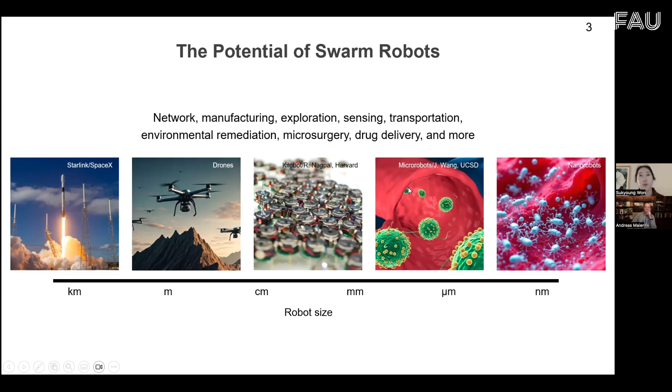Swarm intelligence has some key components. The most important thing is the local communication between the agents. Each agent can interact with nearby agents, and by these local communications, the multiple agents can work together and organize to adapt in new situations and respond to changes in the environment.

Because of this collective behavior, the agent swarm can complete a task even if some agents fail to come to mission completion. The remaining agents keep working together to finish the mission, which I call fault tolerance.

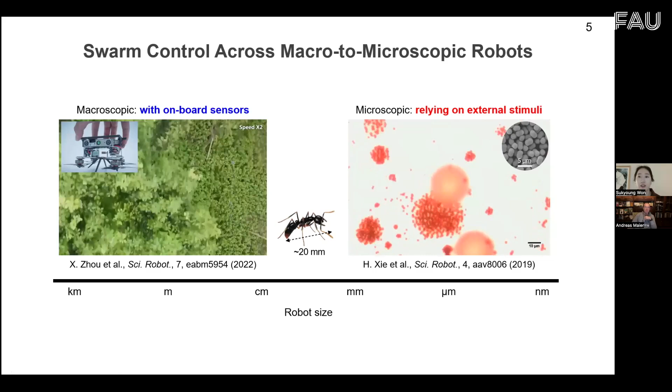To control swarm robots, the macroscopic robots typically use built-in sensors inside the robot body. However, when the robot size decreases, it becomes difficult to integrate sensors and batteries inside the robot's body. So instead, these small-scale robots rely on materials that respond to external stimuli like light, magnetic field, or ultrasound.

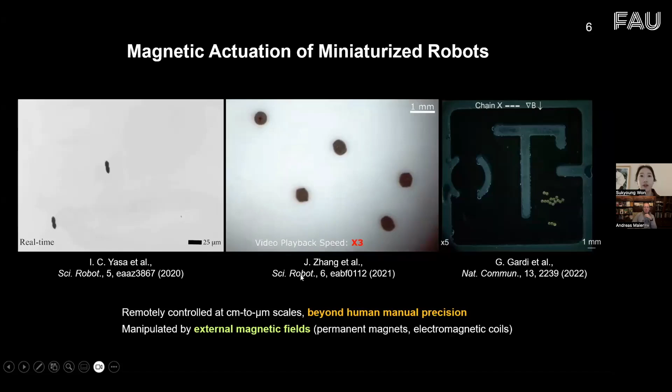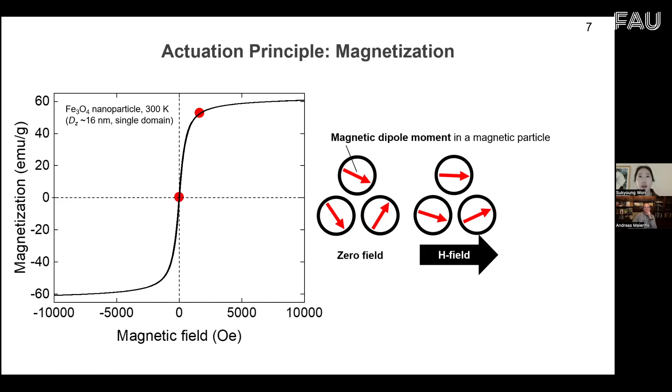Particularly, magnetic robots can be remotely controlled in the microscale environment where manual control is not feasible. By adjusting the direction and magnitude of the applied magnetic field, we can precisely control the motion and direction of these microrobot swarms. This magnetic actuation is induced by the magnetization of the magnetic materials in the robot body. The magnetic dipole moments within the materials tend to align with the direction of the external magnetic field, and this alignment generates the magnetic torque applied to the microrobots.

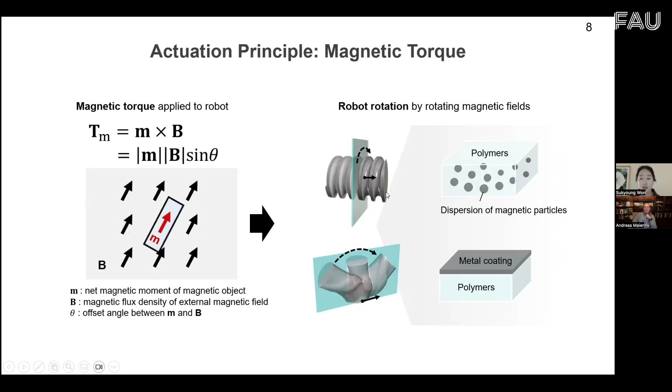When we apply a rotating magnetic field, the dipole moment continuously aligns to the direction of the rotating field. So we can demonstrate rotational modes of the robots, such as corkscrewing, pivoting, rolling, or other rotational motions. To realize magnetic swarm intelligence, we need to think about the magnetic interaction energy, because the microrobots are positioned very closely to each other.

Magnetic interaction energy increases rapidly, as this equation shows an inverse cubic relationship with dipole distance. Due to this high interaction energy, robots may assemble unintentionally, and this aggregation makes it difficult to control the desired motion or predict the trajectory of the robots. So to achieve magnetic swarm intelligence, we need to implement the key components.

First, the important thing is local communication by magnetic interaction. The robots require controlled magnetic assembly and disassembly, and based on this local magnetic interaction, the robots can show self-organization with reconfigurable swarm behavior through multimodal actuation.

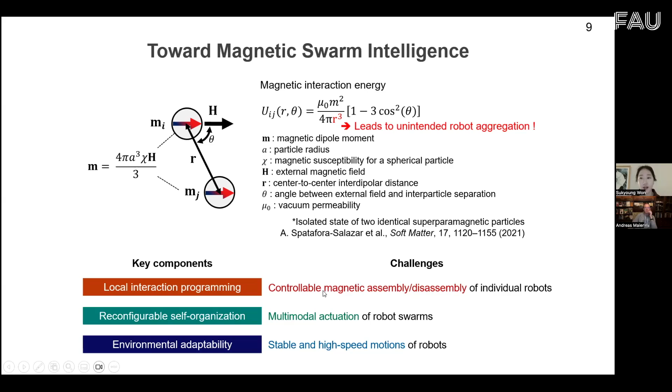And the last one is environmental adaptability. These robots require high-speed actuation while maintaining steering stability even at high speed. So we can ask, what if we can control the distance of the magnetic particles by processing the polymer and magnetic particle composites?

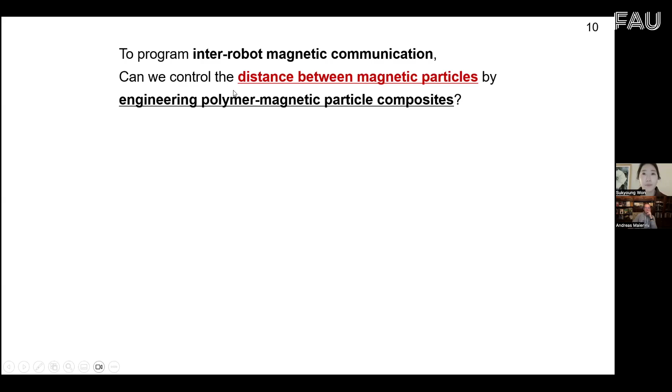This enhances the inter-robot magnetic communication, enabling more precision and swarm controls. One possible approach is to modify the spatial distribution of the magnetic particles. For example, we can adjust the particle dispersion inside the robot body or apply particle coating onto the robot surface. According to this magnetic interaction energy equation, the decrease in particle distance drastically increases the magnetic attraction. That means the surface-coated magnetic particles can enhance the inter-robot interactions and promote the self-assembly between multiple robots.

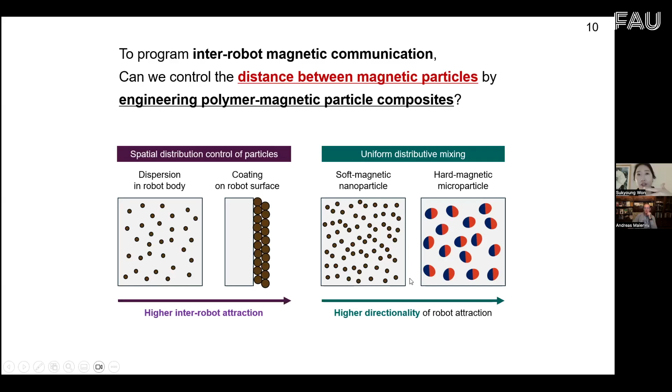Besides the spatial distribution, we can also consider the magnetic properties of the particles, such as soft magnetic or hard magnetic properties. These magnetic anisotropic profiles in the robot allow the programmability of the assembly directions. So the first introduction is that the magnetic nanoparticles are uniformly distributed on the nanoscale in the polymer composites to achieve independent motion of multiple magnetic robots. This can minimize interruption from the magnetic force between the microrobots.

However, nanoparticle dispersion is challenging due to their high surface area to volume ratio and their closer interparticle spacing compared to microparticles at a given concentration. Additionally, these nanoparticles have a high diffusion coefficient, meaning that they move easily within the composites. As a result, they exhibit stronger interparticle interaction, leading to particle aggregation, which could negatively impact the robot performance.

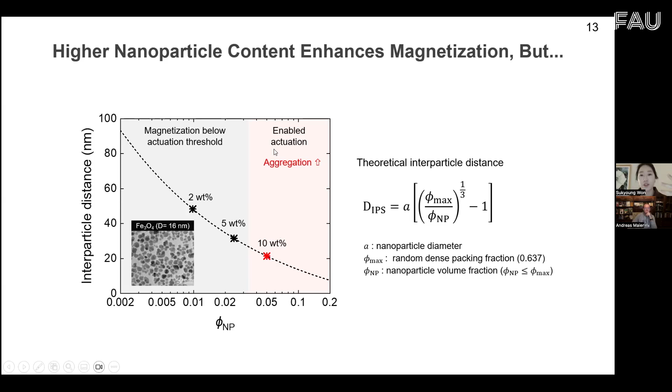Additionally, we require high nanoparticle concentration to obtain enough magnetization and actuation. However, as we can see in this graph, this decreases the interparticle distance and promotes nanoparticle aggregation. So we implement the rapid precipitation method for achieving distributive mixing of these magnetic nanoparticles.

First, the polyurethane and the nanoparticles were mixed in a good solvent, which expands the polymer chains by increasing their radius of gyration. Then the polymer mixtures were rapidly precipitated in the poor solvent, which contracts the polymer chains by reducing their radius of gyration. This rapid polymer collapse trapped the nanoparticles, preventing macroscopic phase separation. And we can see this nanoscale dispersion of the nanoparticles in the thermoplastic polyurethane matrix.

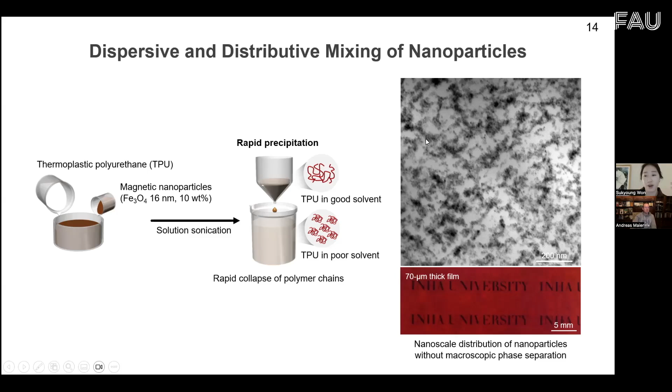We chose the thermoplastic polyurethane matrix because of its high elongation capability of over 600% and its thermoplastic properties. Due to TPU's high flexibility, we could do super twisting, stretching, and transform the two-dimensional nanocomposite films into three-dimensional helical microrobot structures. And by applying heat treatment, we could shape-fix these helical structures after the twisting processes.

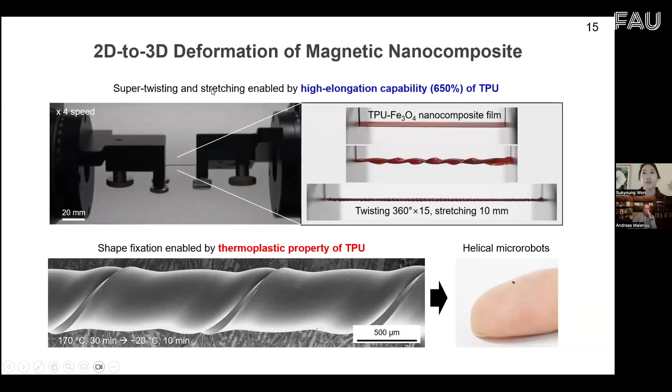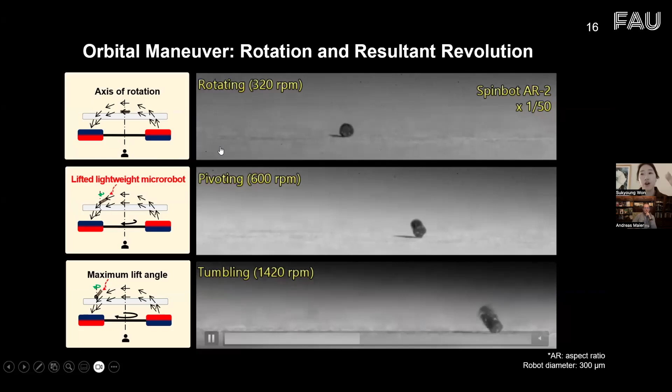Because of the lightweightness of these nanocomposite-based robots, with a weight of only 180 micrograms, they could be easily lifted along the direction of the magnetic flux generated from the two permanent magnets. When these two permanent magnets rotate underneath the microrobots, the robots follow the direction of the rotating magnetic field. So we can control three multimodal actuations of rotating, pivoting, and tumbling depending on the frequency of the rotating magnetic field.

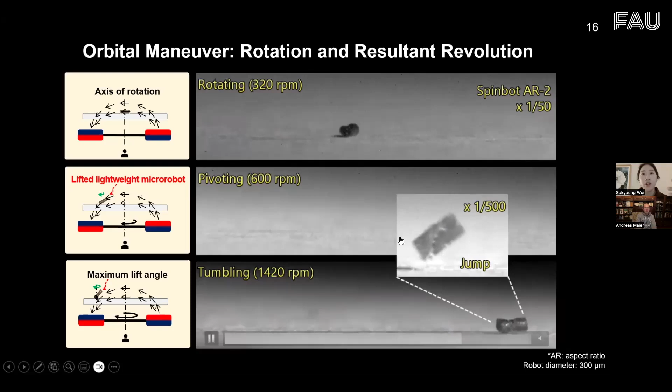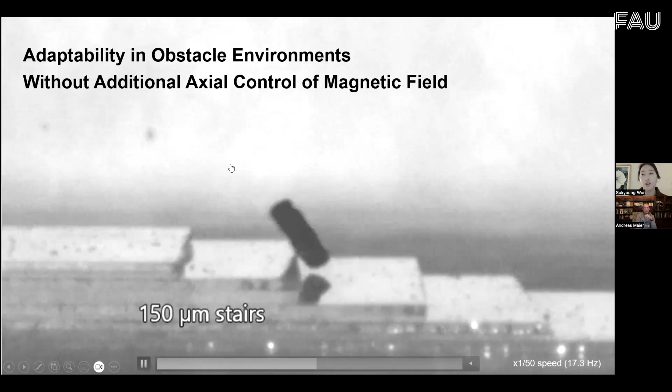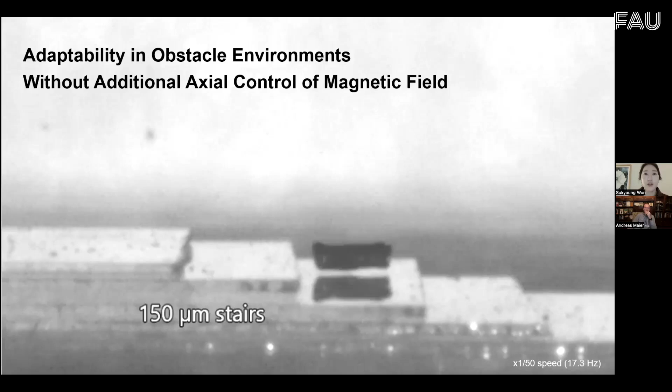Particularly at a high frequency of the magnetic field, the robots can show tumbling motions with a jump behavior, allowing rapid actuation and adaptability in obstacle environments, even though we did not additionally control the axis of the magnetic field. The rotation and revolution of the microrobots result from the force balance between the centrifugal force of the rotating magnetic robots and the magnetic centripetal force from the permanent magnets.

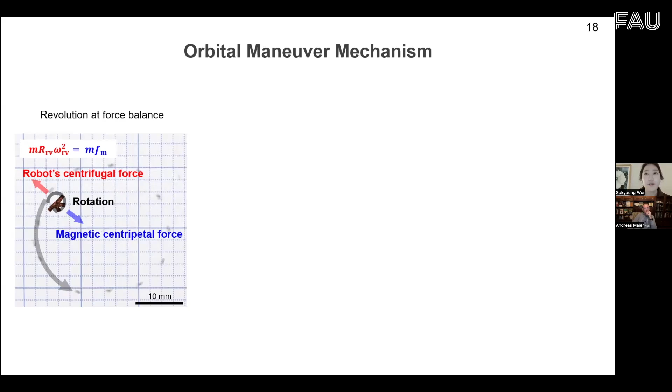So we can expect their trajectory, because the orbital radius of the microrobots is determined by the robot body length and the magnetic frequency based on this force balance equation. So we can tune their trajectory and actuation mode by adjusting these factors. And for the collective behavior, these orbital maneuvers were achieved without magnetic interaction between the robots due to the high actuation speed of up to 60 body lengths per second for the tumbling motion case.

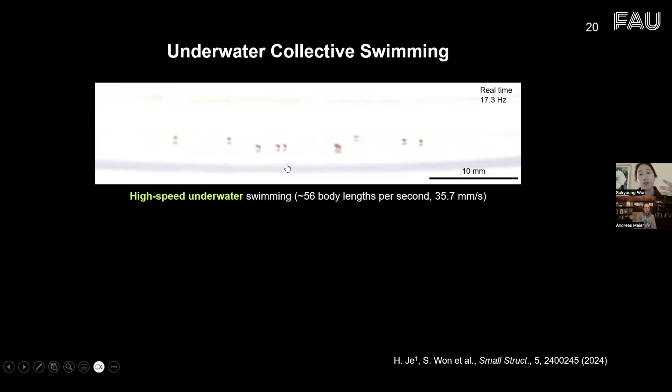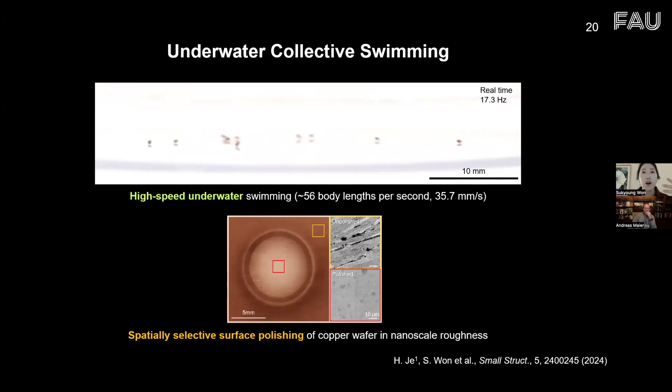Additionally, robots with different aspect ratios experience varying centrifugal forces, enabling independent multimodal actuation of these multiple magnetic robot systems. These robots could even demonstrate collective swimming underwater at a really high actuation speed of 56 body lengths per second. Using this high-speed collective swimming behavior, we successfully demonstrated nanoscale surface polishing of the wafer using abrasive silicon nanoparticle solutions. However, for this high-speed actuation, steering stability is also really crucial.

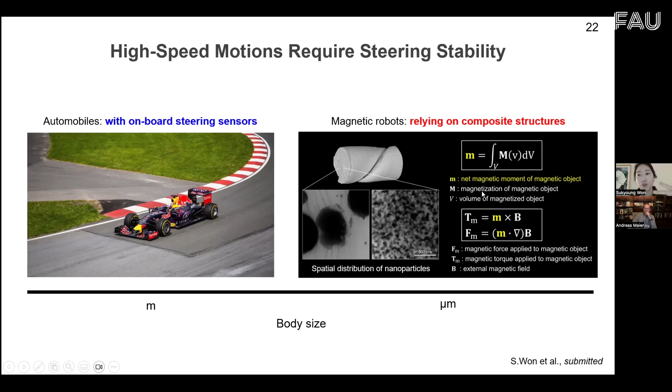However, this non-uniform nanoparticle distribution may cause a negative impact on the robot performance by the non-uniform magnetization and the uneven magnetic torque and force generation. So to compare the different nanoparticle mixing states, we implement two nanocomposite processes to compare the distributed mixing of the nanoparticles.

For this solvent evaporation case, nanoparticles can be easily aggregated due to their high interparticle interactions. So the aggregated clusters with increased diameter are sedimented at the bottom of the nanocomposite films due to the high gravitational forces in the composite mixtures.

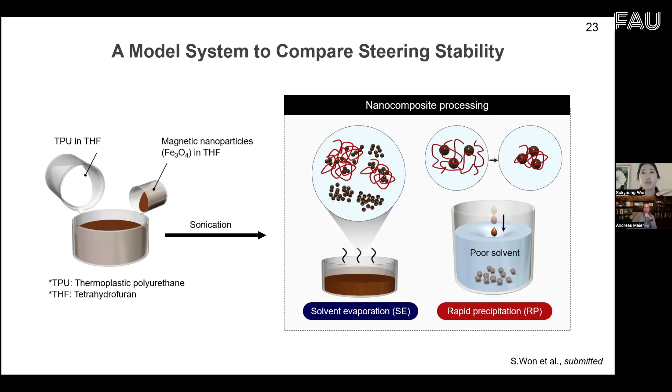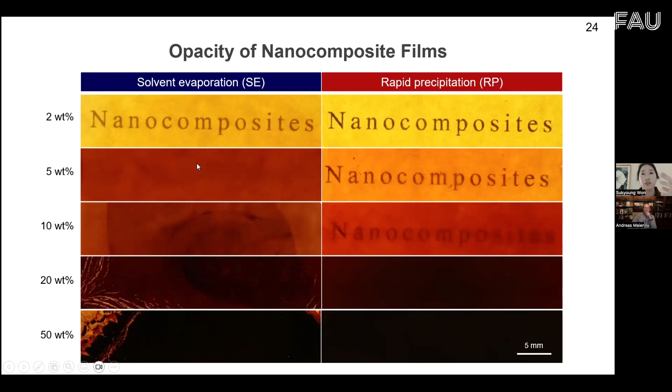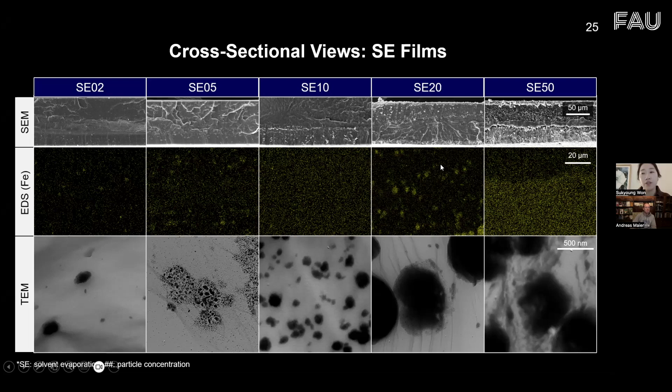When comparing the composite films by using light transmitted through the films, we can observe the solvent evaporation films have reduced transparency because of the increased aggregated particle cluster size. When we check the cross section of the composite films, we could visualize the particle aggregation inside the nanocomposite films, particularly at a higher nanoparticle concentration. In contrast, with the nanoscale distribution of the nanoparticles, there was no macroscopic phase separation even at a high nanoparticle concentration of 50%.

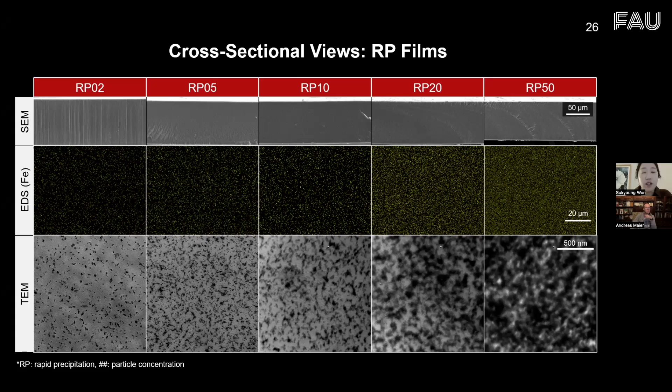And this homogeneous mixing, the distributive and dispersive mixing, was achieved by applying the rapid precipitation technique. We can observe the evidence of the nanoscale particle distribution by analyzing the thermal stability of the composites when we compare the thermogravimetric analysis. This rapid precipitation case results in the peak convolution of the decomposition of polymers because of the nanoconfinement effect of the magnetic nanoparticles.

Basically, thermoplastic polyurethane has two decomposition peaks. The first one is urethane bond dissociation in the hard segment, and the second one is polyol decomposition in the soft segment. This hard segment and soft segment result in the phase separation of the polymer structures. However, when the nanoparticles were dispersed at a nanoscale and intermixed the hard segment with the soft segment, the hard segment decomposition was suppressed by the heat dissipation to the soft segment.

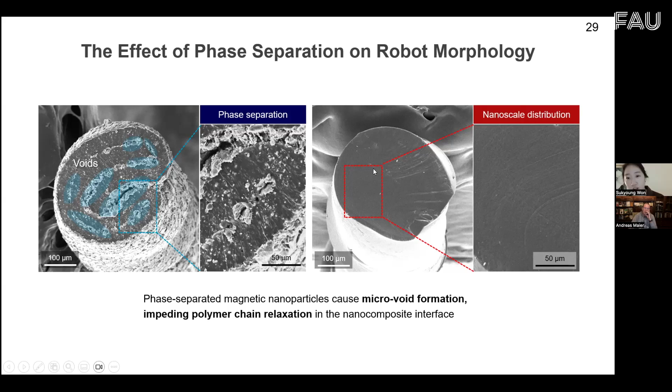Also, the phase separation and the nanoparticle aggregation affect the robot morphology. We can see many microvoids inside the robots because the aggregated nanoparticles hinder the polymer chain relaxation during the heat treatment for the shape fixation of the helical microrobot structures. However, for the case of the nanoscale distribution, there's no significant microvoid. This microvoid and also the non-uniform magnetization profiles cause the non-uniform magnetic torque, and a tilted variation in the center of gravity when they do the pivoting or tumbling behavior.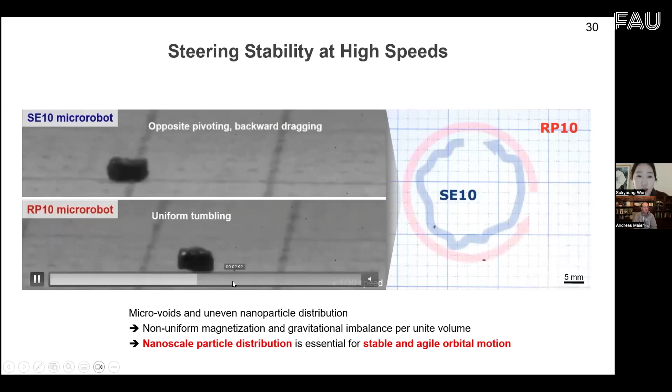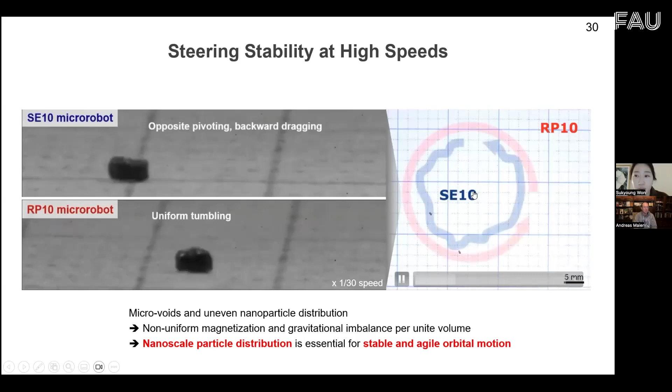So for the case of the solvent evaporation, these microrobots show the opposite pivoting or backward dragging and this non-uniform rotation behavior. That means this study highlights that nanoparticle distributive mixing in the polymer nanocomposite is essential for stable, high speed actuation.

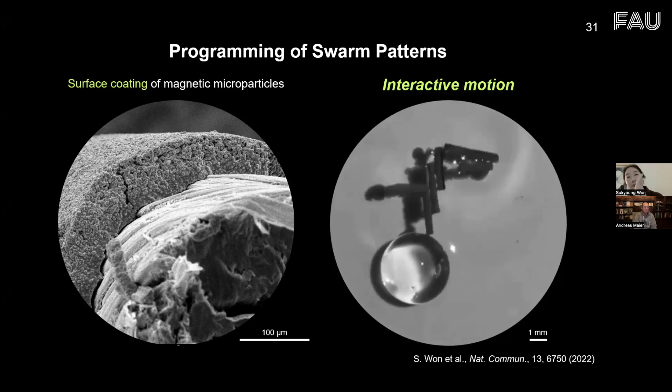So, how about the application of the interactive motion of multiple robots by surface coating of the microparticles onto the robot surface? Because they decrease the interparticle distance, we can get a higher magnetic attractive force between the robots, so we can control the magnetic assembly of the multiple robots. This assembled structure is for vortex-induced cargo transportation.

Previously, many grippers demonstrated multi-cargo transportation for precision control. However, when these cargo numbers increase to the hundreds or thousands, simultaneous transportation is difficult and time consuming. So we can think about vortex generation, and by this vortex, cargo transportation is achieved by the collective swimming of the microrobots. When we generate the forced vortex, the cargoes can be delivered into the inner space, and also around the forced vortex, there are free vortices that can drag the microbeads.

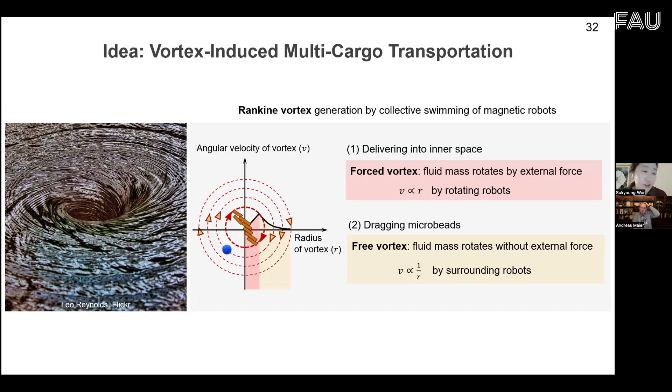So when we generate the high vortex at the surface of the water, I was thinking that we could transfer thousands of multi-cargo by using the collective behavior. However, to generate this high magnitude vortex, when I think about the material design, the most important thing is a low density framework for the rapid actuation to generate the forced vortex, and simultaneously we need a stiff body using high modulus material with a three-dimensional rod structure to overcome the surface tension and the drag forces.

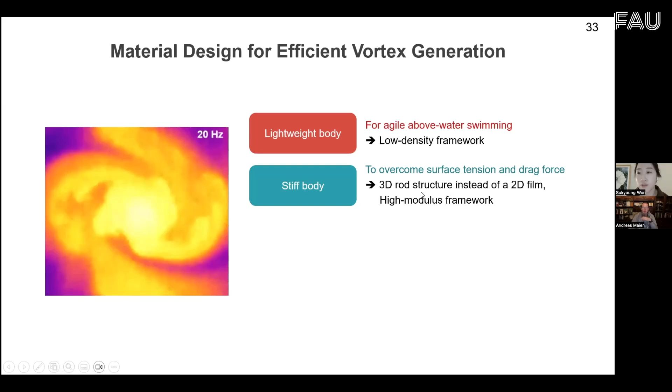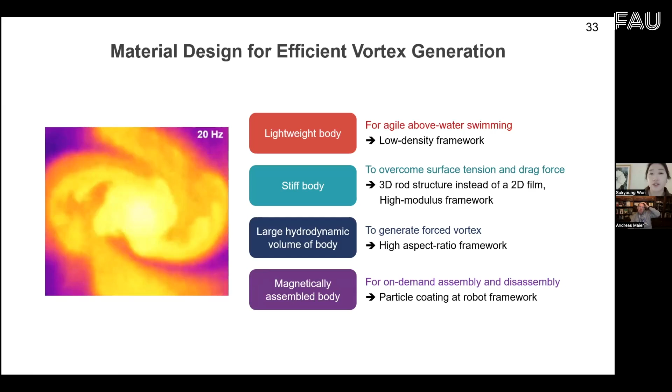And to increase the forced vortex, we can make a high aspect ratio robot design with large hydrodynamic volumes, and this can be increased by using the magnetic robot assembly. And when we control the inter-robot attraction or repulsion, this vortex can be manipulated through this collective behavior.

The structure design was inspired by the human musculoskeletal system. We use the rapid yet strong movement by using this lightweight and high Young's modulus bone. So we prepare this biomimetic nanocomposite structure by using the carbon nanotube yarn, which has a high Young's modulus and lightness because of the nanoporosity.

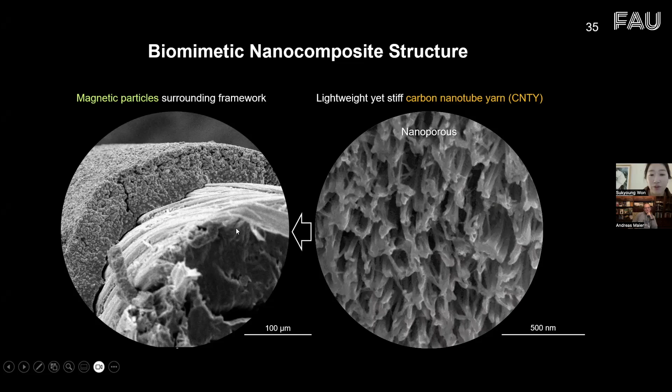This is made by twisting carbon nanotubes into the yarn, and the magnetic microparticles were coated onto the surface of the microrobot for the magnetic attraction. These microparticles could not be inside this nanoporous structure of the CNT yarn framework, and for selective surface coating of the magnetic particles, we applied the dip coating process of the polymer composites. Based on the phase transition of the thermocurable PDMS polymer resins, these microparticles could be bound on the surface of the robot after the thermocuring processes.

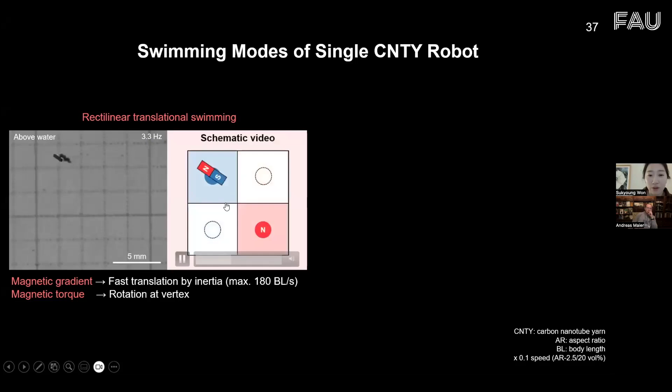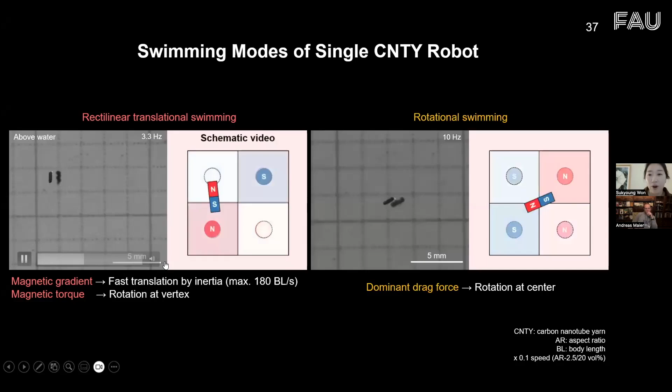And these microrobots were actuated by the pulsed electromagnetic field. This basically makes a rotating magnetic field, and these robots can show the translational swimming motions along the magnetic field gradient, and it shows a really fast swimming behavior, maximum 180 body lengths per second. At increased magnetic frequencies, the robots show rotational swimming at the center because of the increased drag forces over the inertia force applied to the swimming robots.

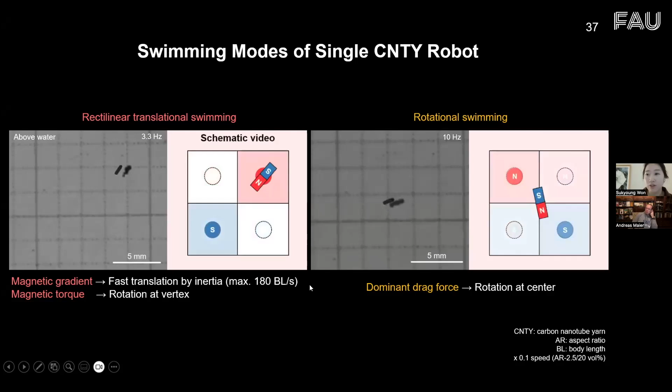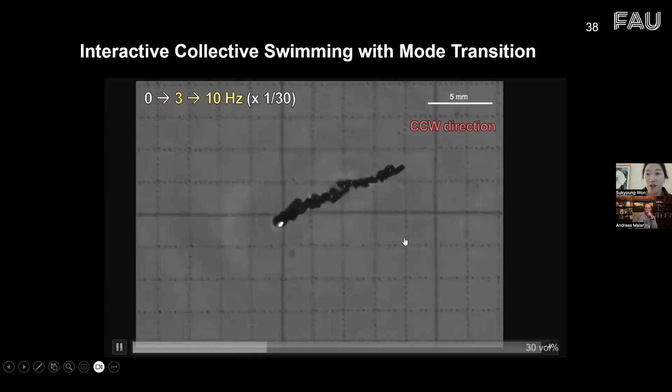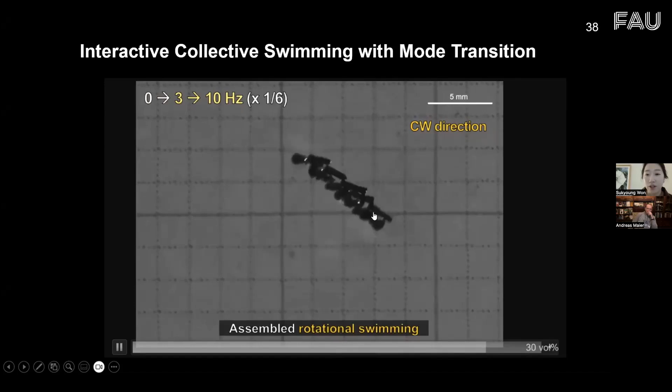We can change the swimming mode even though we apply the multiple robotic system. At low frequencies, they show the assembled rectilinear translational swimming, and when we increase the magnetic frequencies to apply the rotational motions, the robots were assembled to show the rotational swimming at the assembled structures.

This is also basically from the force balance for the actuation mode control. At low frequencies, we can see this rectilinear translational swimming with a high inertia and high magnetic attraction between the robots. However, when increasing the drag forces, the robots show the assembled rotational swimming or fluctuational rotational swimming because of the increased frictional forces applied to the multiple robots.

We know how to control the assembled structures, and we could manipulate the reconfigurable assembly of the collective robots. So that means we could control the vortex generation. At low speed, we did not apply the high magnitude vortex, and when we increase the speed, we can generate the vortex significantly.

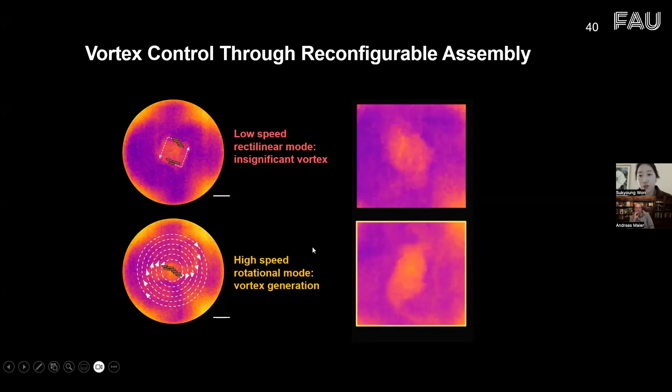So by using the vortex generation, we transport thousands of microbeads at the surface of the water to transport inside this space, or block these transported microbeads by applying the rectilinear translational swimming. And these blocked microbeads are also released by changing the swimming mode. This collective behavior shows the importance of the use of microrobot swarms, because a single robot cannot do it alone, because it could not generate a high magnitude vortex.

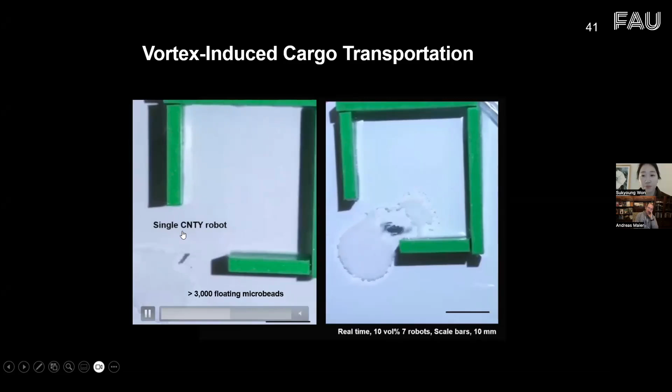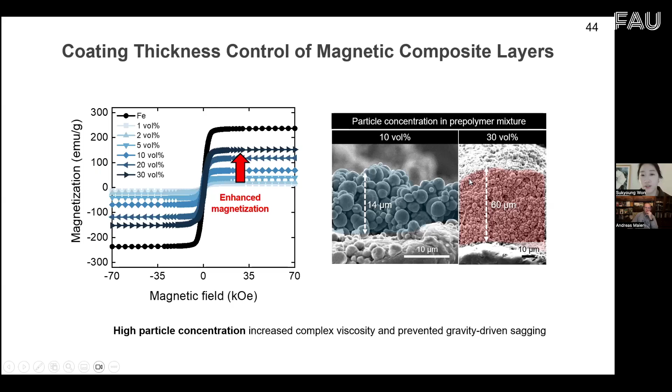And also we can increase the coating thickness of the polymer composites onto the robot surface by increasing the viscous resistance through an increase in the complex viscosity when we increase the particle concentration during the dip coating process, because there was a rheological percolation between 20 and 30 volume percent. So we can see the drastic increase in the coating thickness of this magnetic polymer composite onto the robot surface. So we can enhance the magnetization of the robots.

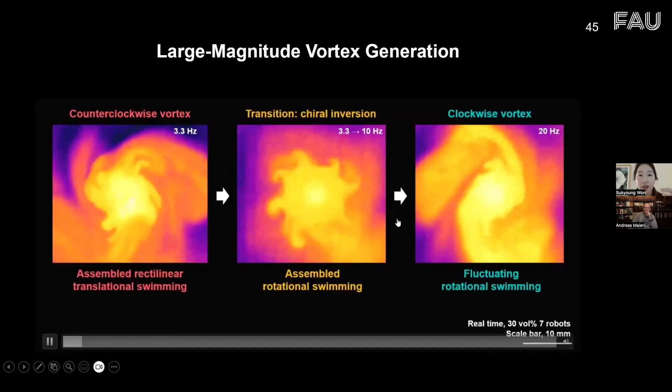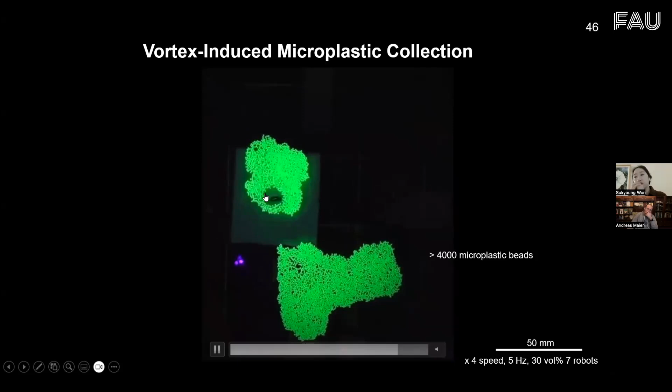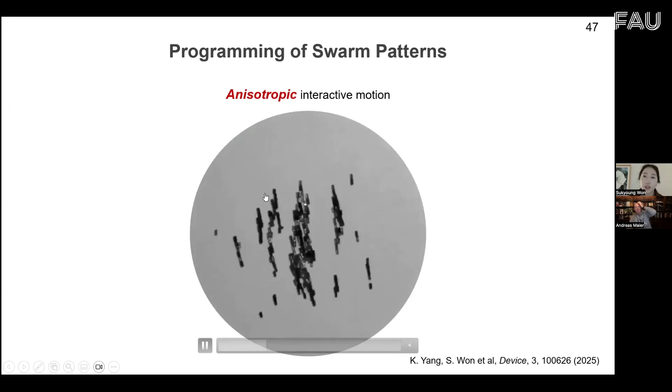And we also can ask whether these interactive motions can be controlled directionally. The anisotropic interactive motions can be inspired by the self-assembly of the magnetic particles. When we see the magnetic interaction energy, these magnetic particles assembled directionally with the dipole direction along the external magnetic field.

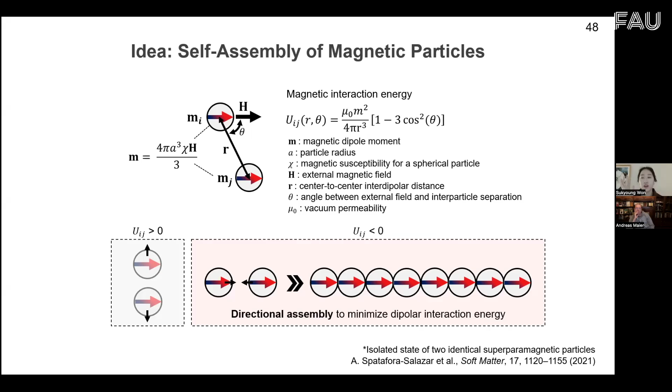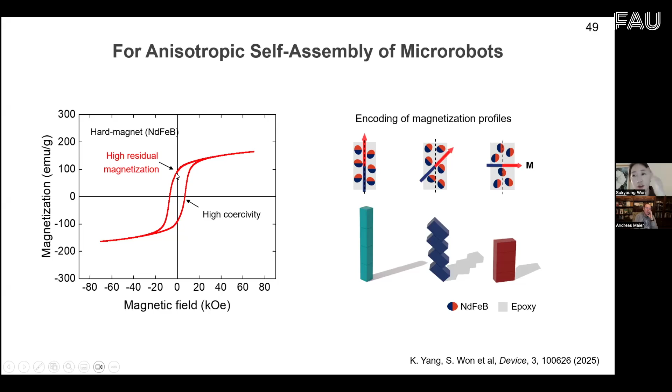Even without the magnetic field, what if we control the magnetization inside the robot body? Previously, we used the soft magnet, which means low coercivity with a low residual magnetization. However, when we use the hard magnet showing high coercivity with high residual magnetization, such as the neodymium microparticles, we can encode this magnetization direction inside the robot body.

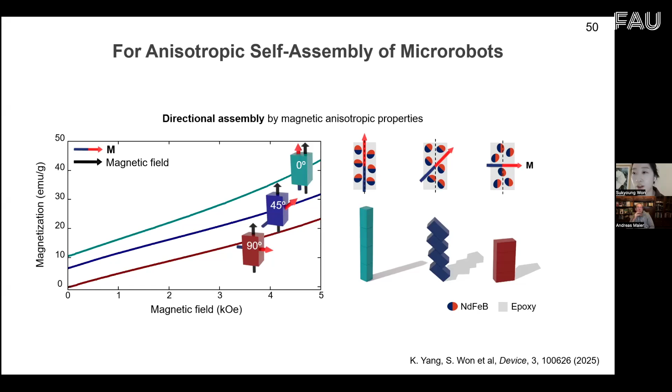So depending on the magnetization direction, we can program the assembly configurations, and also this magnetic anisotropic property of the microrobots shows the directional swarming behavior even at a dynamic state. However, to realize this multifunctional swarm intelligence, such as obstacle overcoming, we need a high stiffness of the microrobot assemblies.

Because with low stiffness the microrobot assembly can be easily disassembled, it could not achieve this kind of complex task. So we chose the high elastic modulus material, epoxy, for high structural stiffness. The epoxy polymer has a high cross-linking density and high glass transition temperature, so it results in high mechanical properties with a Young's modulus of 5 gigapascals.

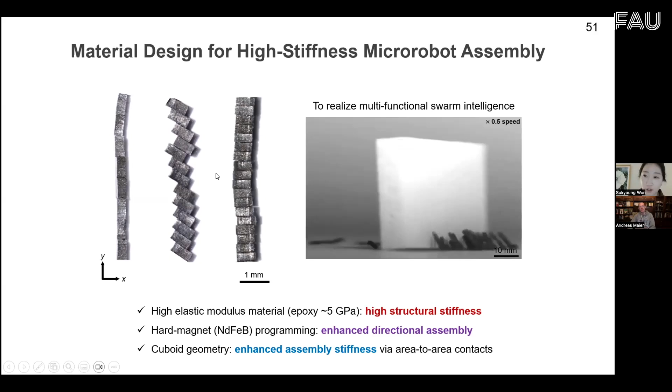This directional assembly can be enhanced by the magnetization profiles, and the assembly stiffness is increased by using the cuboid geometry of the microrobots, because spherical robots are usually assembled through point-to-point contact. But when we use the two-dimensional interface between the microrobots, we increase the assembly stiffness of the microrobots.

Also, the magnetization profile control is important for uniform swarming behavior, because when we did not apply uniform magnetization, the robots show random interactions with each other, resulting in out-of-control swarming behavior. However, when we apply uniform magnetization profiles in the microrobots, they are capable of this kind of uniform assembled rotation when we apply the rotating magnetic field. So we need uniformly magnetized microrobots.

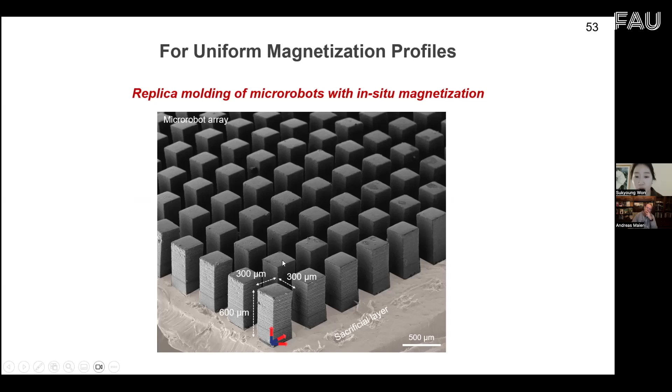However, how can we obtain these microrobots with mass production? So we prepare the microrobots by replica molding, using a microarray composed of 100 microrobot structures in a single master array, and we apply in situ magnetization to encode the magnetization profiles.

The hard magnetic particles are dispersed in the epoxy precursors, we replicate this structure, apply thermal curing for the robot preparation, and apply the magnetization profiles at a high-coercivity magnetic field. Then we can obtain 100 microrobots simultaneously using a single microarray mold.

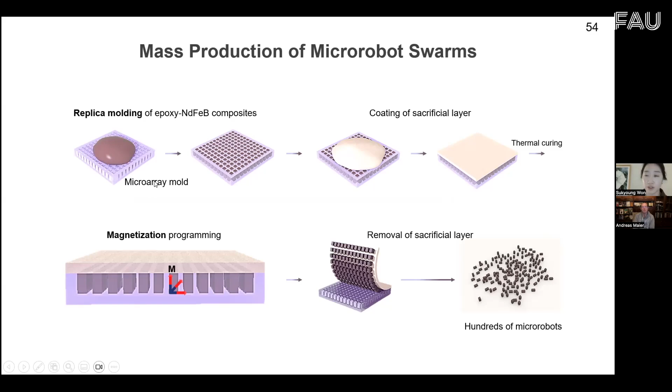The reason we program this magnetization profile is that each assembly has different preferred functions for the swarm behavior. The first one is the head-to-tail assembly of the microrobots, which features the highest aspect ratio. On the other hand, the face-to-face assembly of the microrobots shows the highest contact area to volume ratio, which makes the highest structural stiffness during their swarming behavior.

And this slip co-facial assembly of the multiple robots results in interconnection points through magnetic attraction, and it makes the highest packing density of the swarm behavior. Each swarm of the multiple robots shows different functions. First, for the highest aspect ratio case, these microrobots can pivot to climb obstacles autonomously.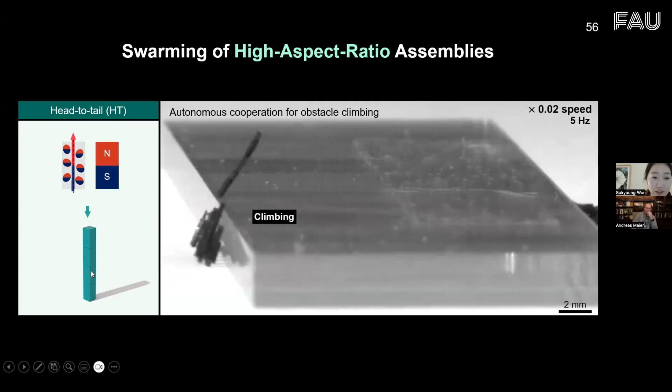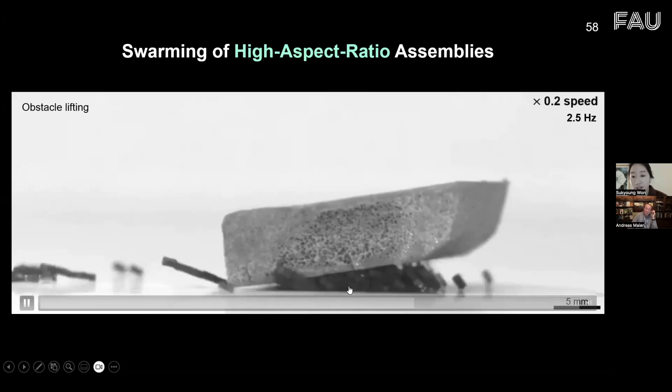And the last one is that these high aspect ratio assemblies can lift obstacles by going inside the obstacles, and this lifting capability is maximized by using the high aspect ratio assembly, because they can generate collective lifting forces, upward forces applied to the obstacles.

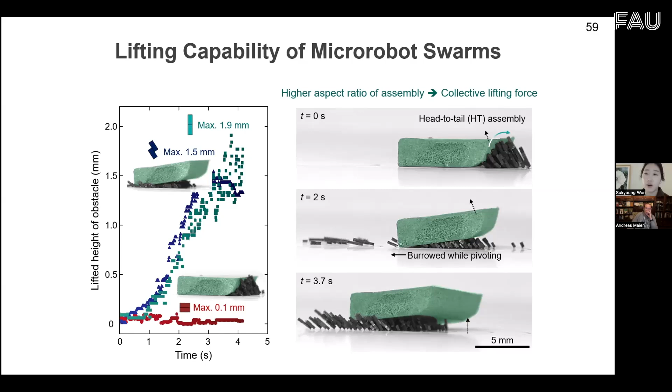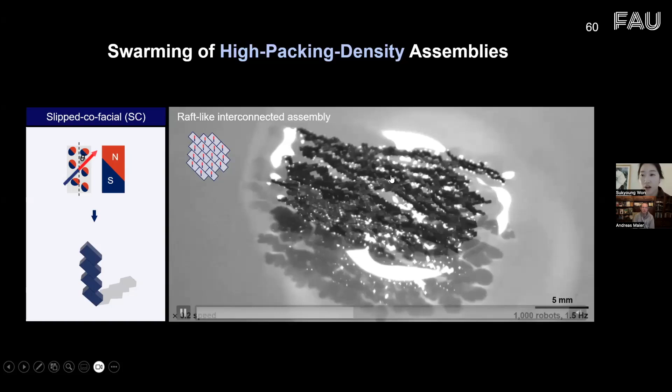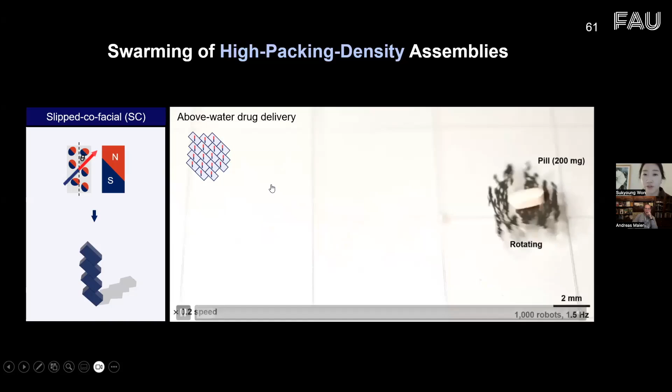Meanwhile, when we apply the slipped co-facial assembly with the highest packing density, these assemblies show a raft-like interconnected assembly at the surface of the water. Using those features, we could transport a heavy drug at the air-water interface rapidly for rapid drug delivery. Also, these high packing density assemblies can generate high elastic energy transfer to transport a heavy conductive indium chunk to connect or disconnect a wire on demand.

So these high packing density assemblies have high potential to transport small-scale cargos where humans could not control that. Meanwhile, when we apply extremely high speed actuation above 80 to 100 millimeters per second, this structure can lose its structural stability.

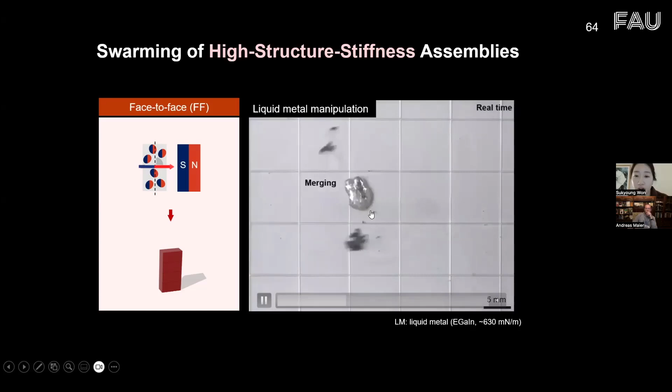However, when we use the face-to-face assemblies, they have maximum inter-robot connection, so they demonstrate a stable assembled structure, and they could generate high impact force for manipulation of high surface tension materials like liquid metal. These high structural stiffness assemblies can transport the liquid metal, shape-morph it into spherical shapes, and perform other functions like cleavage of the liquid metal.

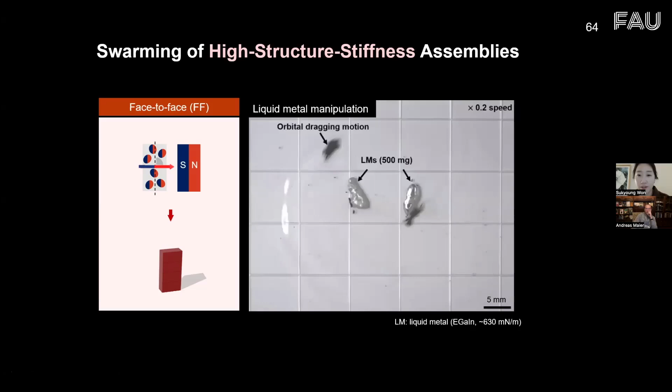They achieve these manipulations. Also, based on the high impact force of the swarming behavior, these robot swarms demonstrate removal of impurities in the tube when we mimic this vascular-like clogging. So they show potential for microsurgery for blood clogging phenomena.

And lastly, when we choose the swarming of the multiple robot assemblies, we can do organism control. For small-scale organisms, we need a lower shear force applied to the organism, because high shear forces can injure it. So we apply the high packing density assembly to transport the organism, and they are not injured by this swarming behavior.

And for the case of increases in body length, for example this superworm, we can apply the high structural stiffness assembly to prevent their direction to go to the feeding site. And when we stop this rapid actuation behavior, this superworm can get fed on demand by the on-demand manipulations.

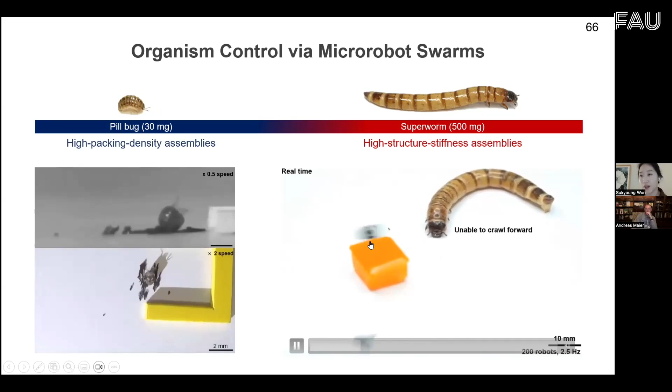In summary, to realize microrobot swarm intelligence and control the interactive and independent motion of these microrobot swarms, I prepared programmable polymer composites through structure-property relationship investigation to optimize the performance of the robot behavior and on-demand multimodal swarm behavior, and also high-speed actuation with steering stability.

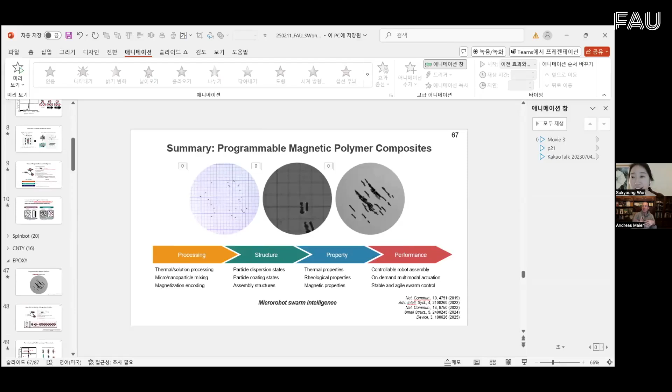Just because when you talk about magnets, it's very important to understand in which direction they're applied and so on. Yes, it is. So you have essentially the rotating magnet underneath that is introducing the circular motion. Yeah. This is super cool, and also that you're now working on medical applications and drug delivery. There have been quite a few works with magnetic nanoparticles manufactured so that they had a drug associated to the nanoparticle, and then you could steer them to focus on a specific site.

Yes, and I think a big problem they have is that a lot of the particles kind of get stuck. They don't arrive at the location. But with the tumbling motion that you show, I think the amount of particles that get stuck can be much controlled. Yeah, because they can lift over obstacles. So when there are obstacles, like wrinkle shapes, they can climb them by changing the direction of the magnetic field. Yeah. Yes.

Because this is a big challenge that they typically have, and with your approach, you solve the challenge. There's also larger robots, the capsule endoscope. It's rather big, like a pill more or less, and it has a tiny camera. Yes. It also has a battery because it records a movie. And instead of putting an endoscope down the throat, you swallow the pill.

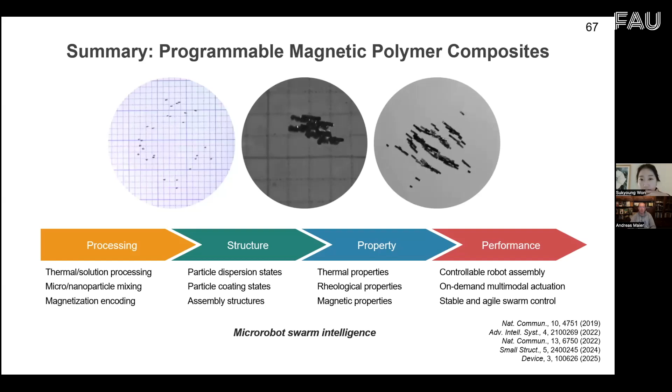Also on slide 39, I think you showed that you are able to control the drag, and there's a question: how do you adjust that? Is that using a different fluid, or the robot geometry? Or is it the magnetic field that you adjust the drag with? Your question is whether another fluid can be applied? No, in slide 39 you had different drags, and the question is how you can control the drag. Okay, let me see.

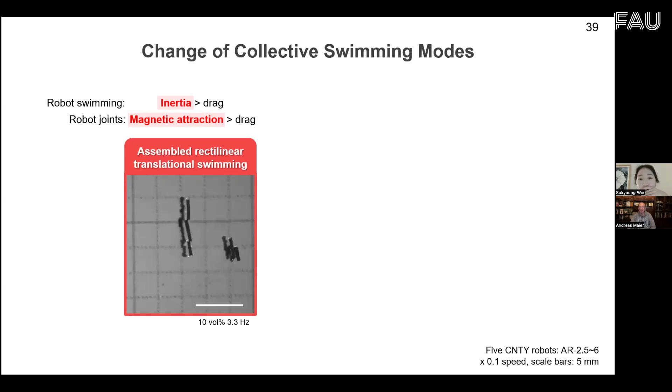The drag is basically, as you mentioned, we can change the magnetic frequencies, and this is a balance between the magnetic attraction and drag. When we increase the particle concentration at the surface of the robot body, we can increase the magnetic attraction, making a higher attractive force than the frictional forces. So we did not change the drag forces, but we changed the magnetic attractive force applied to the robots by increasing the particle concentration on the surface, or the dispersion concentration in the robot body. I see. So these are different robots we are seeing, and different forces, both.

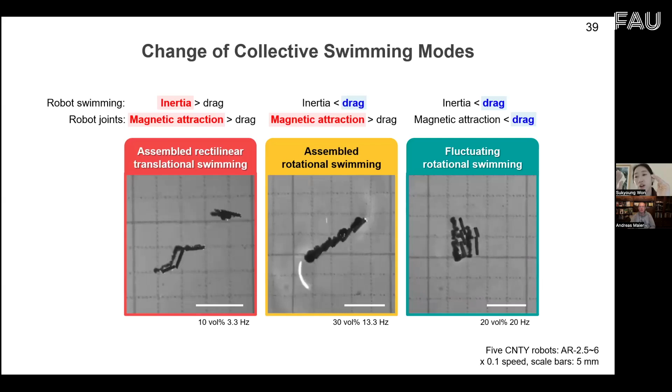Yes, this is just representative videos, but even when we apply the same particle concentration, when we change the aspect ratio of the robots or the rotational frequencies, that makes different drag forces applied to the robots, so we can design the switching of the swimming behavior.